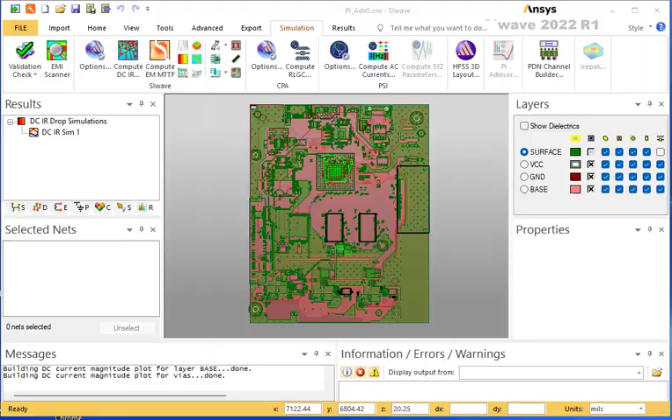SIwave is a power integrity and signal integrity tool. DCIR, one of the power integrity solvers, is discussed in this video. DCIR is used only when all the dies that you have in your PCB, or the ones that you want to analyze, are carrying a fixed amount of current, constant current, like TIAs, power amplifiers, drivers, and many other kinds of dies.

If one of the dies is carrying a variable current, then you need to do DC plus PI. We talked about the PI in another video. DCIR is necessary to study the voltage and current distribution of the power plane distribution network, PDN.

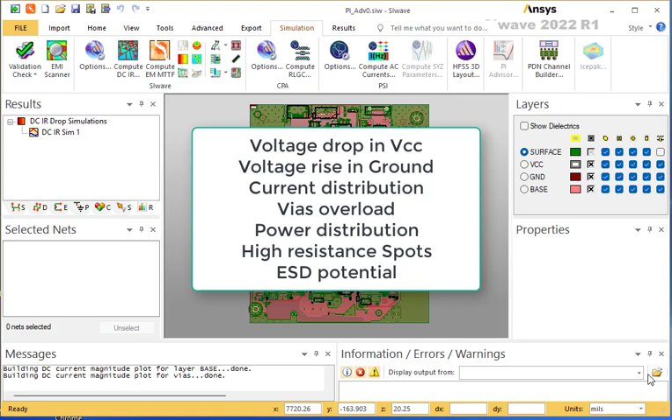The solver calculates the voltage drop in any power plane, voltage rise in the ground plane, the current distribution, the current in each via, detects overloading in any via, detects any massive current accumulations, identifies location of potential ESD issues, and many other defects.

SIwave should not be used to build PCBs. While this is possible, it's not the best way to utilize SIwave. SIwave, when it imports any file, extracts many kinds of information, for example, the stack up, the material, the components, and the nets. So what is missing to do in SIwave is assigning ports. That's all. Then you are ready to start solving.

Before using SIwave, it is highly recommended that the user reads the electrical schematic very well. It will save you lots of time. SIwave, like any other PI tool, understands the language of nets. When a board is imported, SIwave immediately starts looking for single nets. Let me show you a nice drawing here, showing you the definition of single nets.

Any single net is an electrically connected structure without the use of any external component. A single net could occupy many layers but cannot be electrically disconnected. To analyze a power plane, one needs to identify its nets. It could have just one net, or it could have many nets. And if there are many nets, they should be connected using resistors or inductors, and that will construct what we call a passive link.

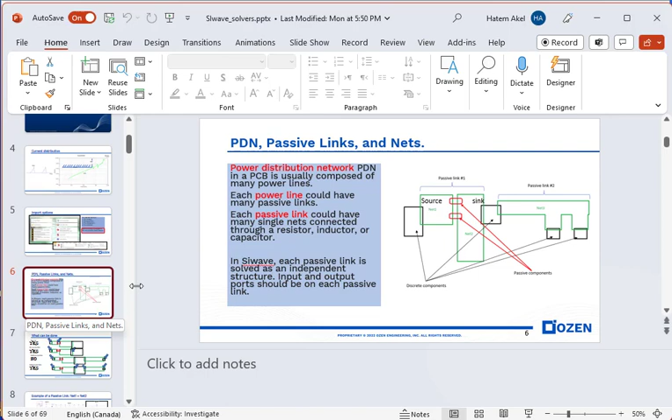So you can see here, you can solve one net, you can solve one passive link, you can solve many passive links in a power plane, you can solve many power planes at once, but you cannot solve one power plane with an integrated circuit in between. This is not a valid setup.

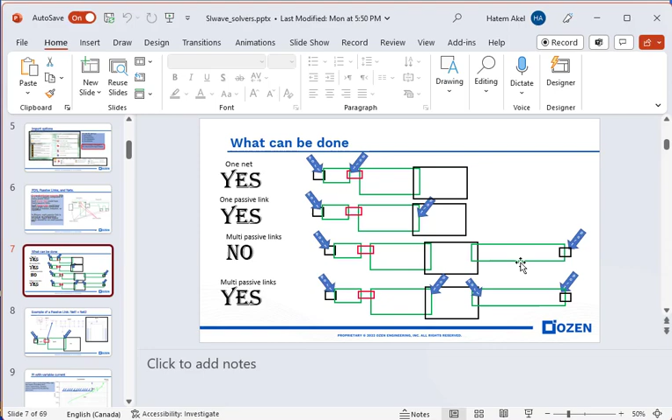Great. So any process in SIwave, DC, PI, signal integrity, or radiation, starts by selecting a solver. Once a solver has been selected, so if I click here, for example, and I click DC, SIwave generates a dialog box for you. Think about this dialog box as a form, where SIwave will fill up this form with all the information that it was able to extract from the file.

For example, when you click the DC solver, you will get this dialog box, and you see to the left in this section the list of all the power planes. And notice that SIwave always puts the power planes in red, while RF lines, control lines and any other kind of lines are in black. That's how SIwave distinguishes between them.

That's how SIwave is telling you that it's recognizing these ones as power planes, while it doesn't recognize these ones as power planes. Of course, there is a way to shift between them. There's a way to change a power plane into an RF line, and an RF line to a power plane. But that's not the subject of this video.

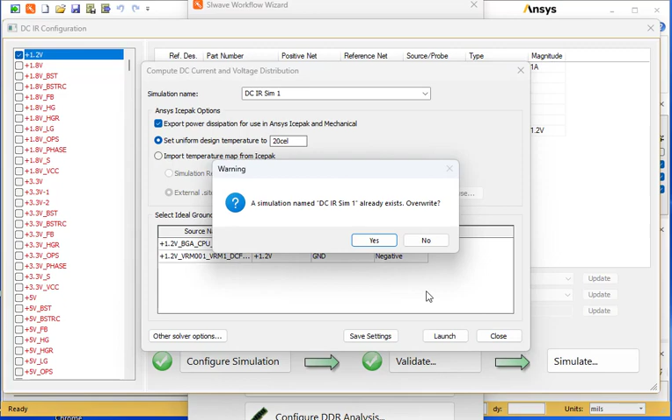So that's the recommendation. There are other solver options, practically, which is the accuracy. What kind of accuracy do you want? You want optimum accuracy or optimum speed? You want to compute inductance and other stuff? If you want, you can select that, and you can save or export settings, and you can also import old settings. So I'm gonna keep everything the same, and we launch. So if you launch that, already exists, I will say yes, replace it.

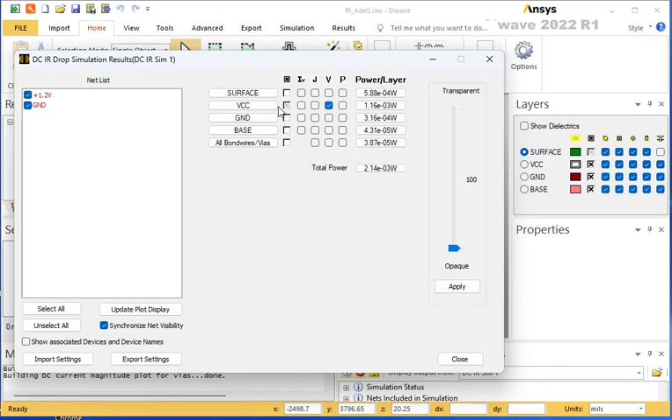After finishing solving, you go to the results panel and you will find this. If you right click, now we come to the results. The first thing you're going to be looking at is a plot of the currents and the voltage. So if I click here, SIwave will produce this table for you. And in this table, you can select what you want to see. In my case, I will start by looking at the voltage on the VCC. So you click here and you look at the voltage on the VCC.

I'm going to hide all the layers except this layer to look at the voltage. And as you can see, it gives you the voltage from the source, from the VRM to the CPU. And if you move the mouse around it, it will give you the voltage on each point in the model. And you can see this is the ground. See, the voltage at the ground is very small, E-4.

What the user is looking for is a smooth transition of the voltage. One expects to see very small changes in large power planes. But any significant delta means lots of power is being dissipated in the wrong way.

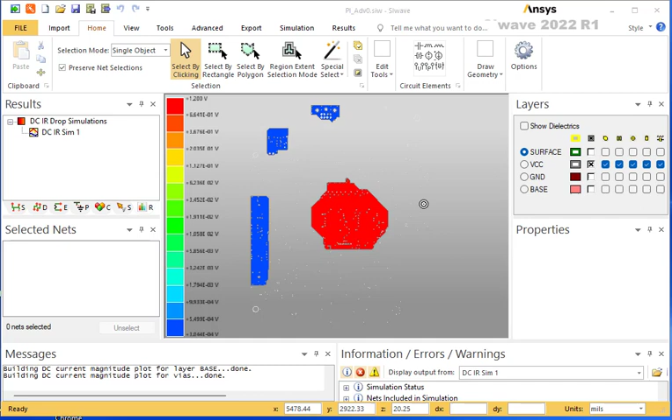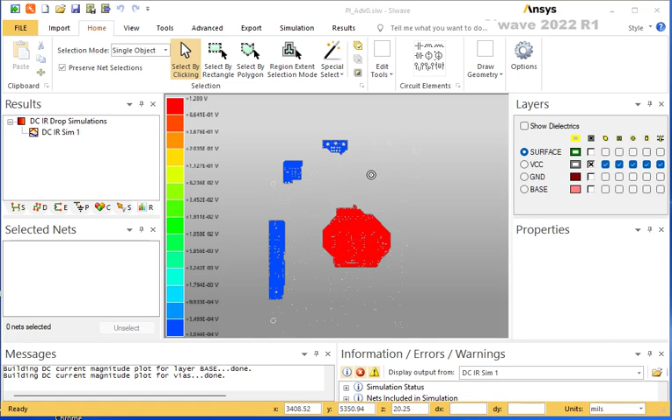Now, the second thing you would like to examine is the voltage of the ground planes. Many designers make a mistake by simply focusing on or examining the voltage in the main VCC line. You also need to worry about the voltage rise in the ground. So to do that, make sure to go to the top where your components are. And in this table, activate the right layer to look at it. Then you can examine your ground.

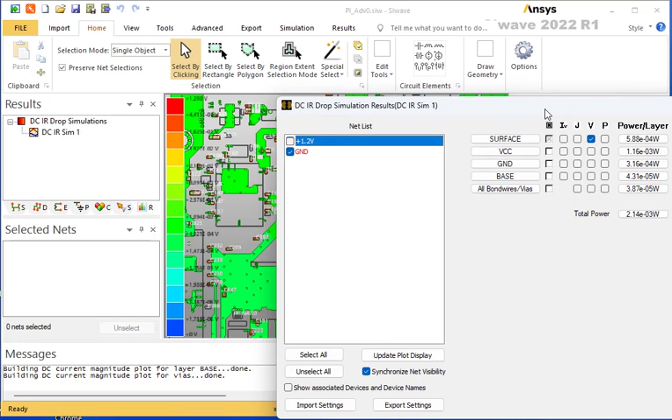So you look for power planes ground. In our case here, let's turn off the voltage and focus on the ground. You can zoom in on the grounds and you can check what is the voltage seen by the die. So in our case, we are looking at 0.6 millivolt. That's a good sign. It means we are not losing too much on the ground side.

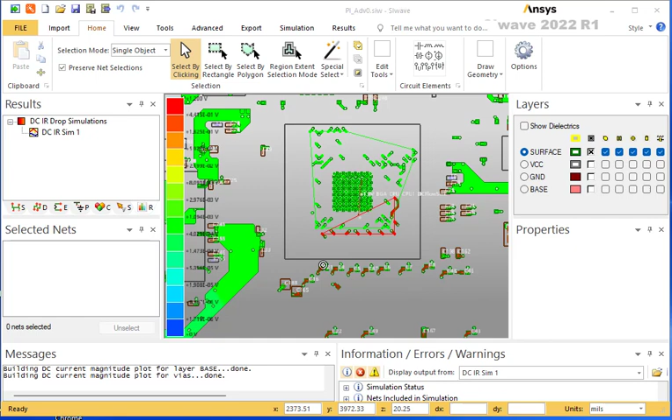If you see large numbers, then it means that the current flow in the ground planes is not correct. So it's not just focusing on the current flow or the voltage drop on the main line; the return path also has to be correct.

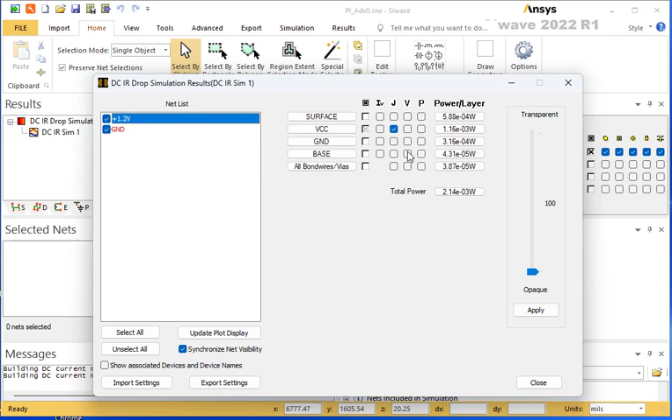The third most important information is the current distribution inside your power plane. So the way you do it, you go here, you activate the current distribution, the current plot, and you look at the region of the VCC. And as you can see, it provides you information about the amplitude of the current as well as the direction of the current, both of them on the same plot.

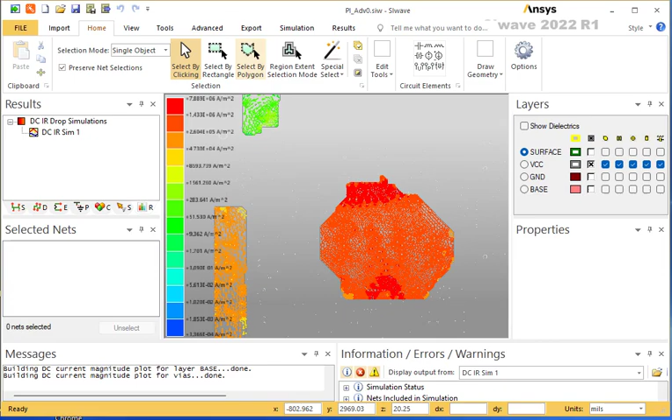So this plot provides you information about any bottleneck issue in the power plane network or in the ground plane. SIwave, as I said, provides you two pieces of information in the plots, the current magnitude and the direction. Any concentration of currents will show up in red and must be examined by the user. If it turns out that the section is narrow, then one needs to find a way to widen it.

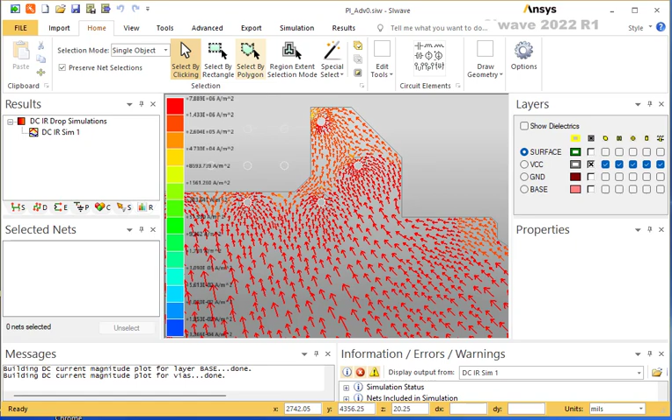Also watch for any sharp corners like this. If one notices that the current flows in an irregular way around sharp corners, then there is a potential for an ESD issue. Always, even with DC applications, avoid having sharp corners. Always make them round corners. It doesn't cost anything to make them round. But keeping them sharp will have a potential for creating ESD issues in the long term, and you don't want to do that.

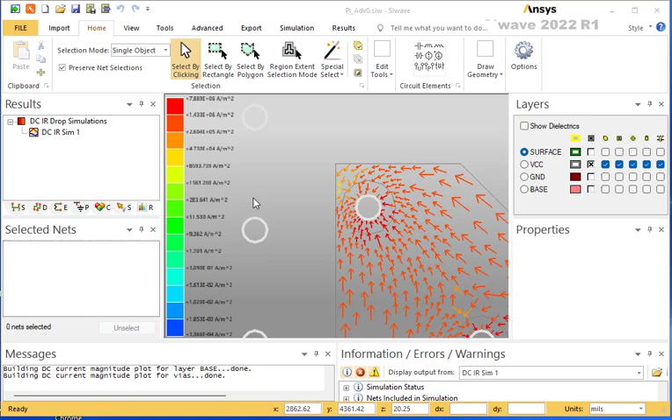Now, what's next? The most important thing from the analysis of the DC is the via density. How much current is flowing in the vias? So to be able to see that, you go to display element data, and SIwave will populate this dialog box for you. So if you go and you select vias, SIwave will display all the vias and how much current is running through them. It also highlights if any via is carrying too much current.

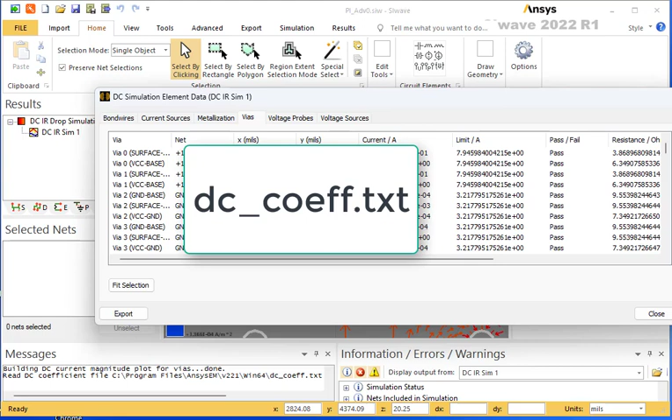The limit is specified in a file called dc_coeff.txt. The default numbers determine if the via will pass or fail the test, the limit. So you see here, there's a pass and fail. The user can change these limitation numbers, but the default numbers are standards. If any via carries too much current, the probability of a PCB failure becomes very high. Designers then need to increase the number of vias in that area if you see any failure.

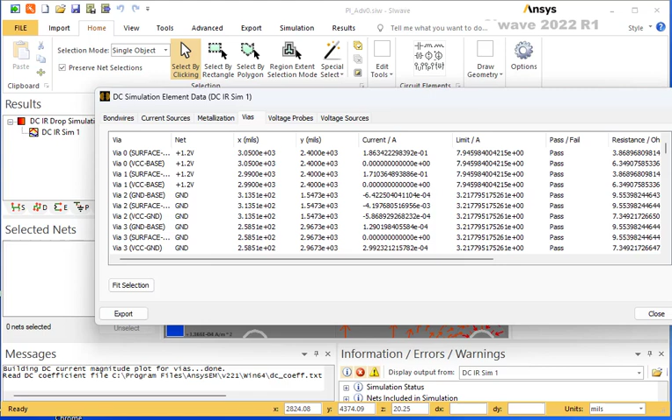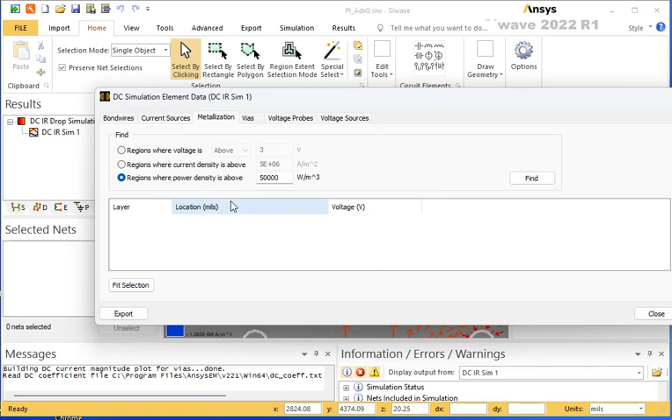Now, since we have this, we can also look at the density in the metal. SIwave can identify sections with voltages greater than or less than certain values. It can also find regions with current density above a certain value. It can also find regions where power density is above certain values. So you can use these to examine your board section by section and make sure that there are no weaknesses within your structure, within your design.

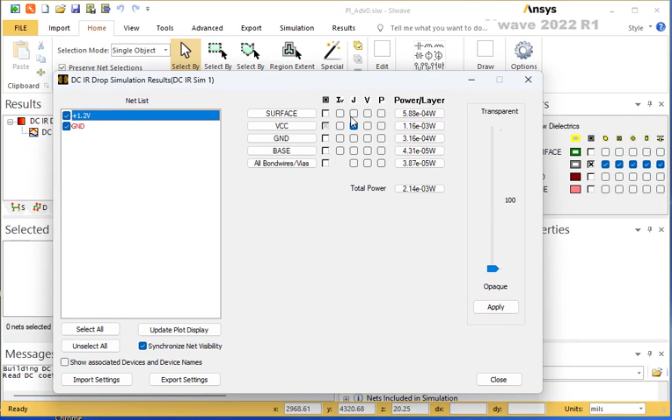You can also look at the voltage probes. Remember, I was talking about the voltage probes. If you used any voltage probe, you will be able to come here and see what is the voltage value at that location. And the last thing you can see from this table is the power distribution. So I can look at the power distribution.

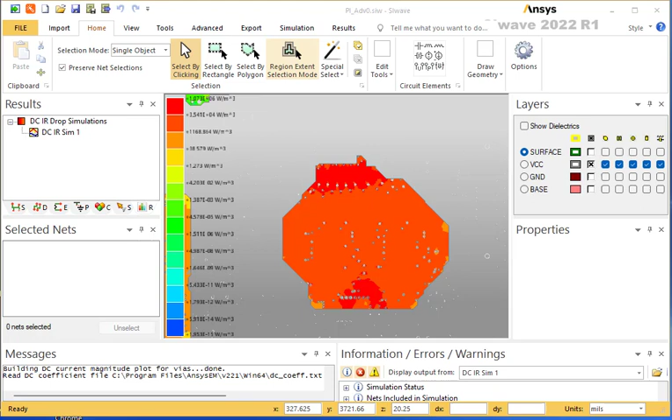Again, you can see that it is almost identical to the current distribution. This information is important if the user wants to do a thermal analysis. In this case, the Icepak program inside SIwave, if you go here, there's Icepak. If you click on this button, Icepak will take the power distribution and convert it into temperature distribution. That's all it does.

The power distribution is also used to calculate what we call the MTTF, which is this one, which stands for mean time to failure. The MTTF solver is also available within SIwave. So power distribution is necessary data for more advanced and important calculations that a PCB designer needs to do.

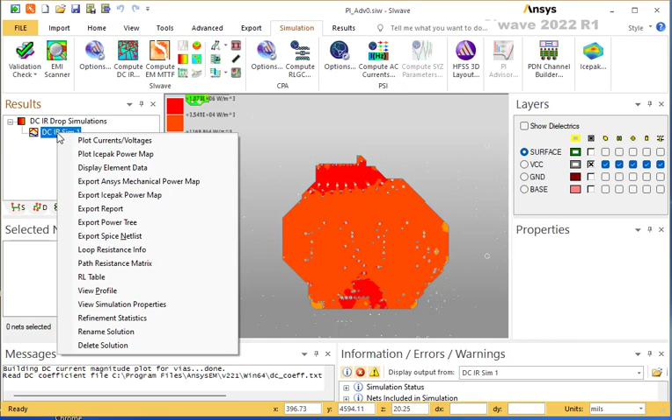From the calculations of the power density and the current and the voltage, you can also calculate the loop resistance. And the loop resistance is practically the total resistance of the main line and the return path. So both the VCC and the ground summed together.

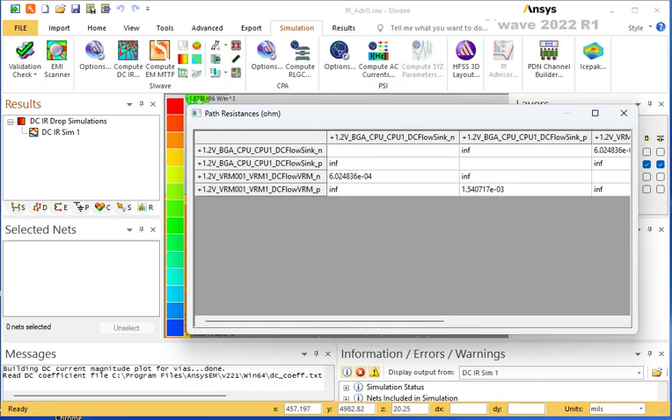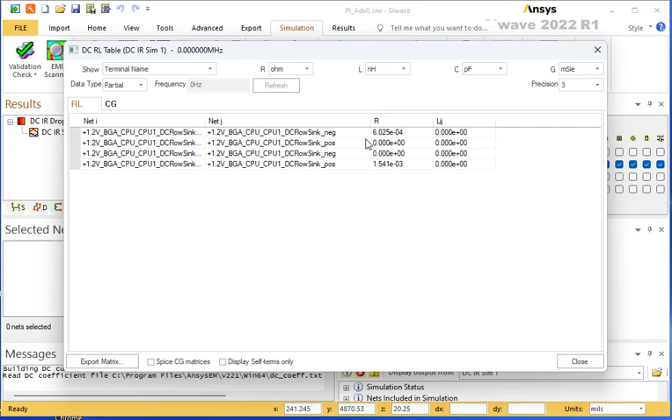Or you can go into more detailed information, which is path resistance. So path resistance will tell you how much is the loss on the VCC alone and how much is the loss on the return path. It will distinguish between them. You can look at it from here, or you can look at it from the RL table. Both of them will be available for you, so you can tell which one of them is the main contributor to the total resistance of your power plane.

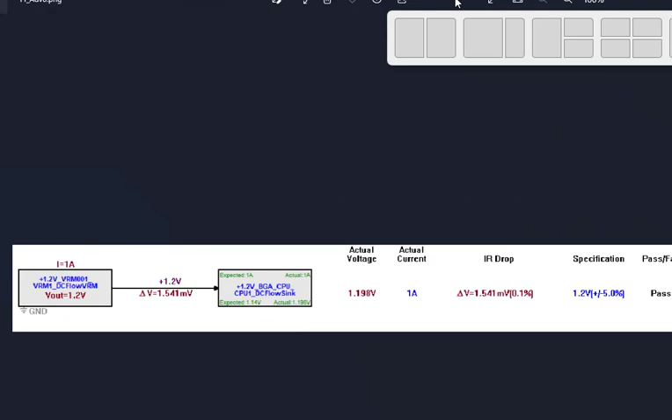In addition to doing all these calculations, SIwave allows you to export things. So it can export a power tree. So what is a power tree? It is a flowchart. Let me show you how it looks. And this flowchart summarizes everything in one place in a graphical way. So you can see the voltages, the current, the direction of the flow of the current.

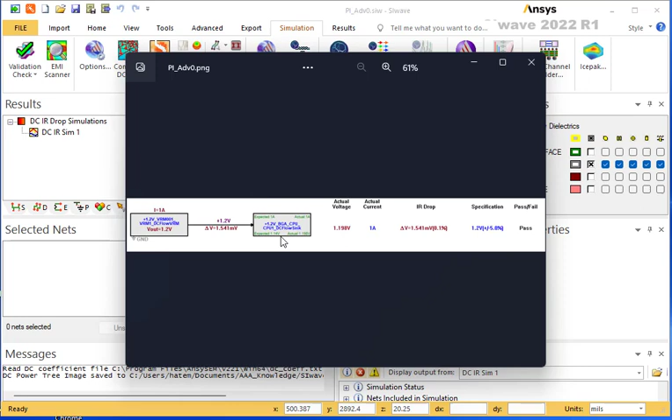It is very important for the user to produce this flowchart to confirm that all the connections of all the power planes inside the model are correct. The flowchart is the best way to confirm that. It also summarizes, as I said, all the results in a graphical way, making it easy to understand the current flow inside the PCB. So it is very important to do that at one moment of time. Plus, it produces a nice image for you so you can use it in your report.

And the last thing I wanted to talk about is exporting SPICE netlist. So this will create a netlist SPICE model, and SIwave supports many of them, as you can see in this list, whether it's HSPICE or Maxwell SPICE, PSPICE, Spectre, or Simplis.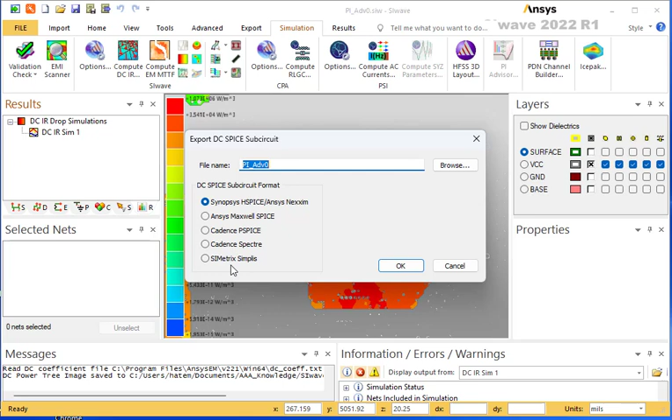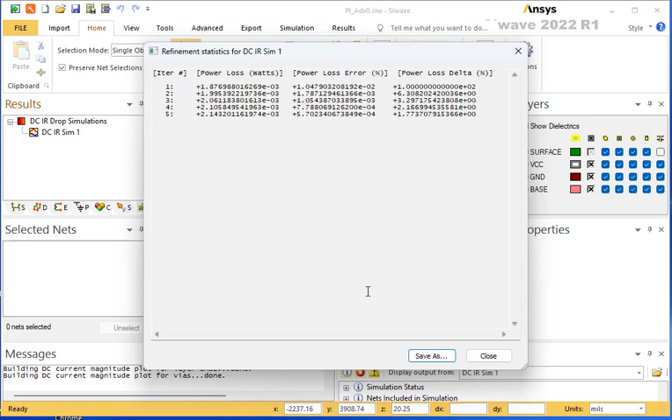After finishing solving the problem, the first thing you would like to do, especially if this is the first time you solve this model, is to check the refinement statistics. So what will refinement statistics do? It will tell you about the convergence in this column 4. You need to make sure that the convergence is happening in a smooth way. If you see any disturbance going up and down, that's a sign that something is wrong with the physical structure. Usually with the DC, it goes in a very smooth way. Also, the number here is where the system stopped. You can improve that by selecting optimum accuracy instead of balanced.

The second thing you would like to check is the profile. So the profile will give you information about the mesh used in each section and the time it took to solve the problem. Now, this is important at the beginning, first to understand how much mesh has been used. But second is to compare different models at different times to make sure that everything is being solved in the proper way. So if you did something and you're happy with the results, you compared it to measurement, then you went after that and solved another one, make sure that the number of triangles is exactly the same. Then you know that the results can be trusted.

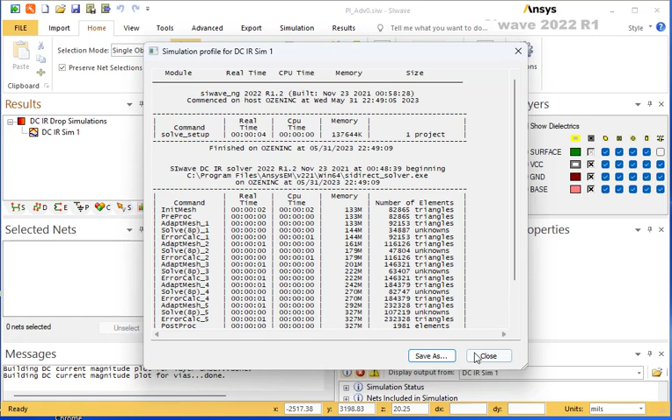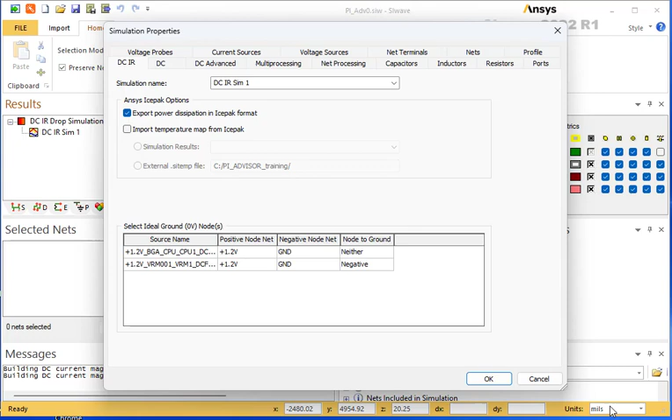The other thing you can do is look at the simulation properties. This is practically going to take you back to your setup. And this is important if you are reviewing the results after many months or years and you are not sure how these results were produced. Then you can select this option to see the setup that created these results.

So in conclusion, checking the solution, displaying data in many forms, and exporting data in many forms. These are the things that the user of SIwave can do from doing the SIwave DCIR solution.